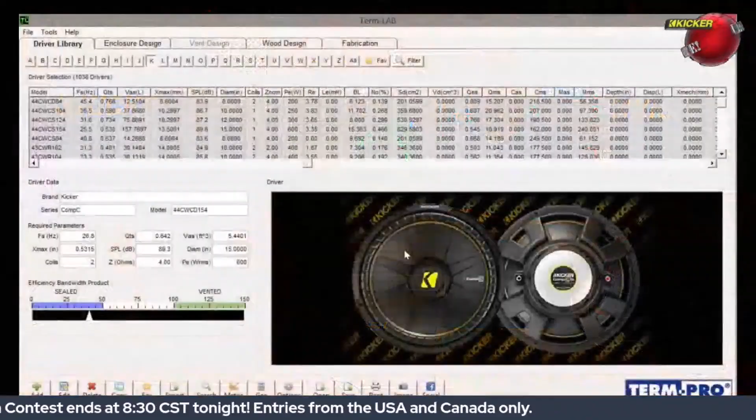Yeah. Now, I'm a customer. I have nothing in my car currently. I'm shopping. I call the number. What's going to happen in that process? I'm just trying to figure out what to buy. Yeah, well, we just ask them what they're looking for, what they expect from a subwoofer system or a full system, if that's what they're looking for. Sure. At that point we need to know the vehicle so we can figure out what speakers they need, and then amplifier, obviously wire, all the accessories they need for hooking that system up. Or components.

Let's just create something make-believe here. I'm Joe, customer. I just called up, what woofer do you want? Really, I like L7s. Okay, so let's go with an L7. So let's do an actual box design here on Term Pro so you can get an idea. And you guys do this every day on the phone for customers. Oh yeah, and we can get at least a rough idea of what we need.

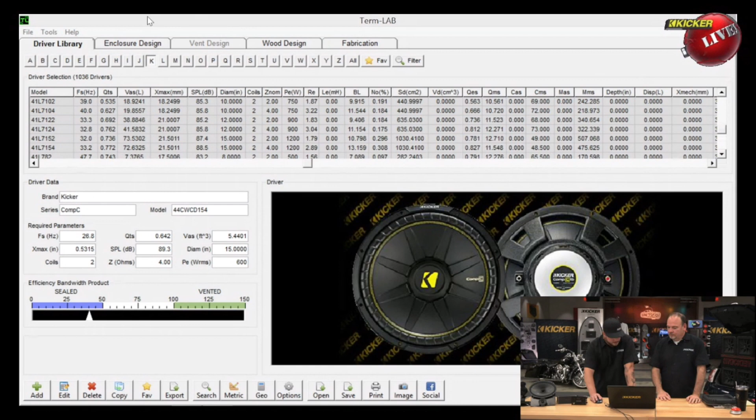Okay. It knocked out fairly quickly, and we have a lot of people that call in for SPL and want to do bandpass, or they want it for a side-by-side and they want a bandpass enclosure, because that works really well outdoors. So we'll just go ahead and do 2, and we can do just a simple 1-to-1. So 2.5. This looks pretty easy to use. Yeah, it works pretty quick, and everything's adjustable on the fly.

So after you've set your outside chamber volume, that's your sealed side in this. And then common ported chamber, so that's what you're dealing with here. And then this obviously is the response graph over here to the right-hand side. Correct, yeah. It shows our 4th order bandpass. We've got peaks on both sides. And then over here it shows our frequency response for full bandwidth.

So 36, 38? 36 is the F3 on the high pass. Yeah, up to 86, centered at 58. So 36 to 86, centered at 58. And then you can manipulate this.

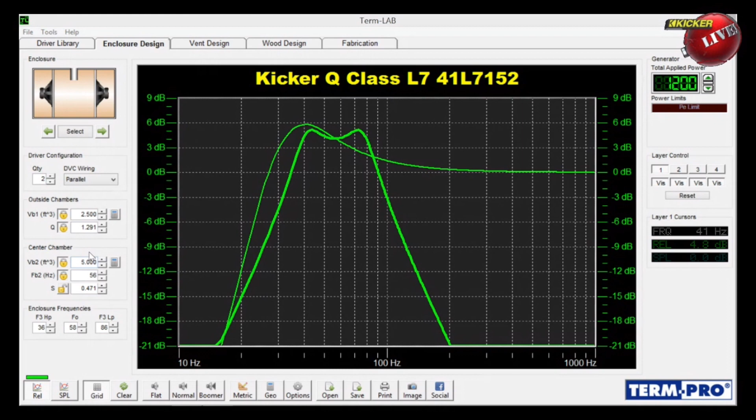So obviously with this kind of box volume, if this doesn't work for the customer at all, you could either try to make the same drivers work in that airspace, or you might end up actually saying we need to make different driver recommendations. Yeah, we can always end up going with smaller woofers. One that we see used a lot in outdoor or in just side-by-sides is our shallow woofers, so the Comp RTs and the L7Ts.

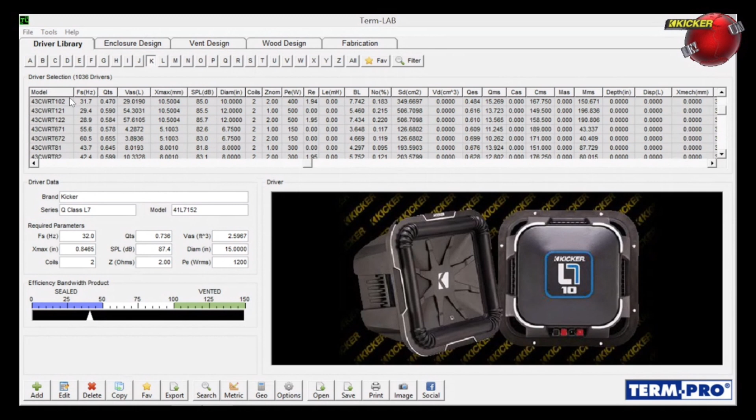Okay. And we see those used, we actually do use those a lot. So we can do a Comp RT10 or CWRT10. Do seal box. We see these used a lot in side-by-sides. Obviously, this is way more airspace than we typically see, but it still, we see our response curve, give us an idea of what area it's going to take up, and how changing box size changes tuning.

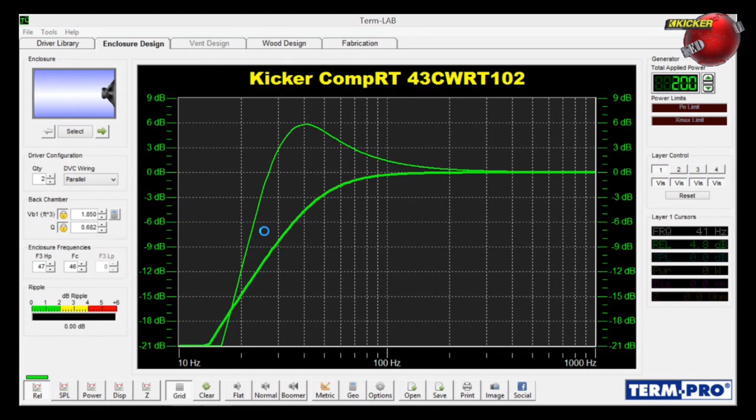And obviously, as I'm looking at here, you had the ability to go change power. So I'm assuming that's just defaulting to the RMS power rating of the woofer. Just defaults to the rated RMS of the woofer, or how much power we want to be applied. But you can always change that, and it'll typically change the response of the graph. It'll change what we see in SPL output. Gotcha. Right there. Oh, there you go. Okay. So this gives us a guess of what it's going to do as far as output goes. Gotcha. So a relative response curve and then a relative idea as far as output based on that power level.

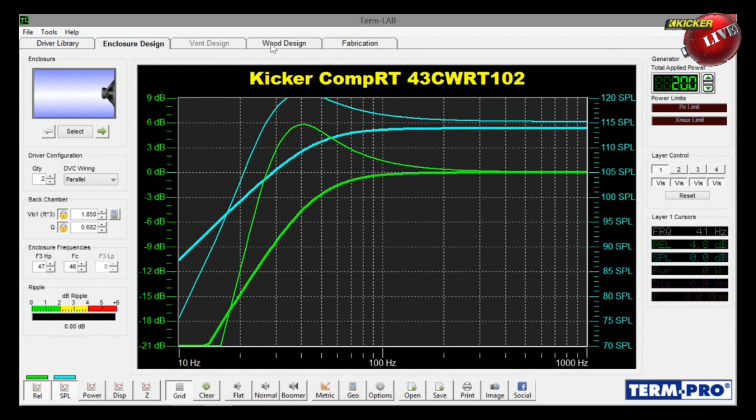Exactly. And then I saw you going over to wood design. So going over there, what does that do for us? So that'll show us an idea of what the box should look like. It doesn't give us woofer, but it gives us an idea. That's a little bit off. But it gives us an idea of how much room it's going to take up overall. So this is saying total volume is 1.9 after woofer displacement and what we set the internal airspace as.

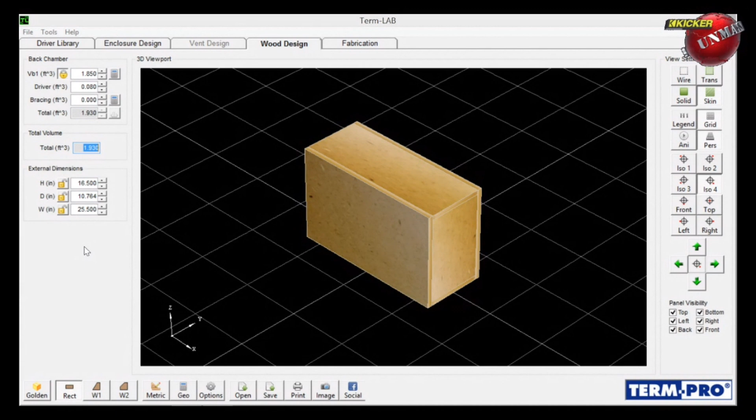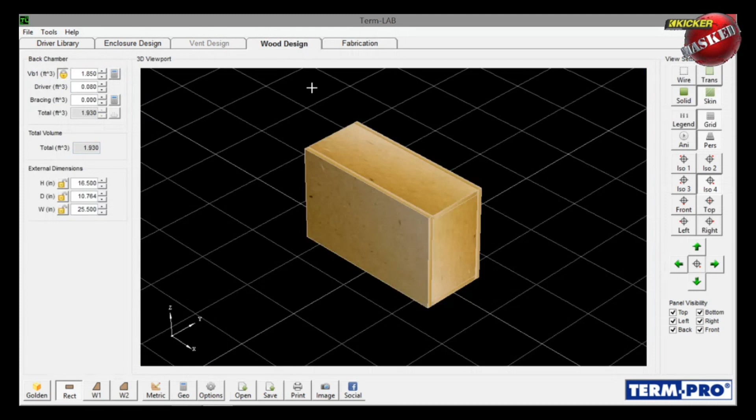So question on this, when you guys are designing this up for someone who does a call-in, do you just give them this information over the phone, or do you guys have the ability to email, fax, or anything like that with it? We can email it because it will give us a cut sheet. Typically to open a TermPro file, you have to have TermPro. So typically we can just take screenshots. And that'll give us our top and bottom panels, front and back, and our sides. And with wood design, we can take away visibility so that we can still see what the inside of the box is going to look like. That is cool.

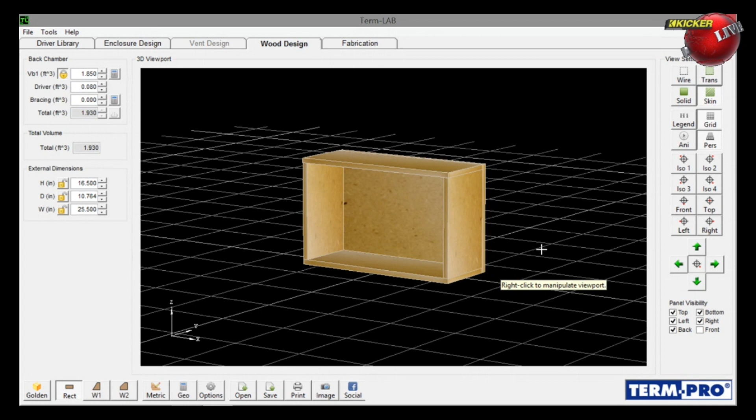So you've got the ability here, on the fly with people on the phone, to design up a box, change the volumes, play with the tuning, play with the power, and when you get something that looks realistic for their needs, you can screenshot them. And we can give them what our external dimensions need to be, and then click over to Fabrication and give them a few screenshots of what our cut sheet needs to be.

Oh, there you go. So we can change it. You can change your Y-axis plots, bar graphs. You can change your plot colors when you're looking at the response curves. Okay. But you can change the color of the wood and what material you want to use as well. So it's got a lot of preloaded dimensions there. Yeah, so 1 inch, 3/8, we can change it to plywood, and you can also change your coverings.

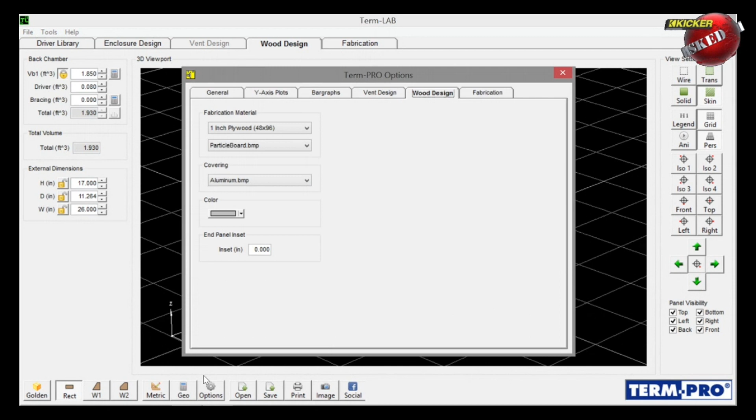Oh, this ought to be good. Particle board with aluminum. There we go. Nice. So it kind of looks like plywood, but it's got an aluminum sheen to it. Check it out. That's pretty cool.

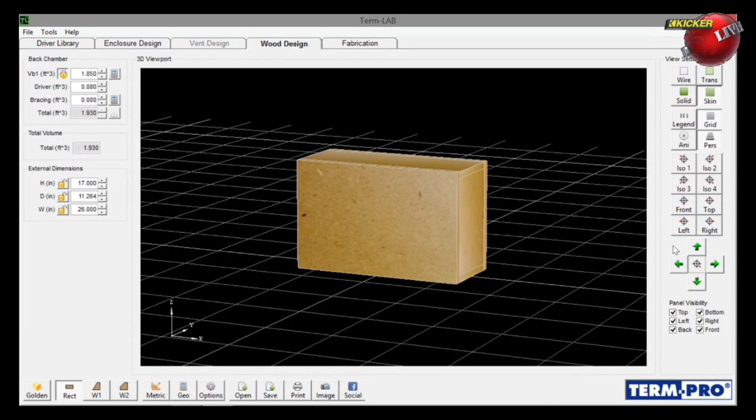So after using both programs, given the choice, you find that TermPro on a daily basis, as far as answering phone calls, dealing with people, is much quicker? Yeah, it's much easier, quicker, more user friendly. It's just quicker to use. Keep going. What I'm wondering is, and this one does give us a render, an idea of what the box should look like. Okay. Versus BassBox does not. So you do get an idea of that right there.

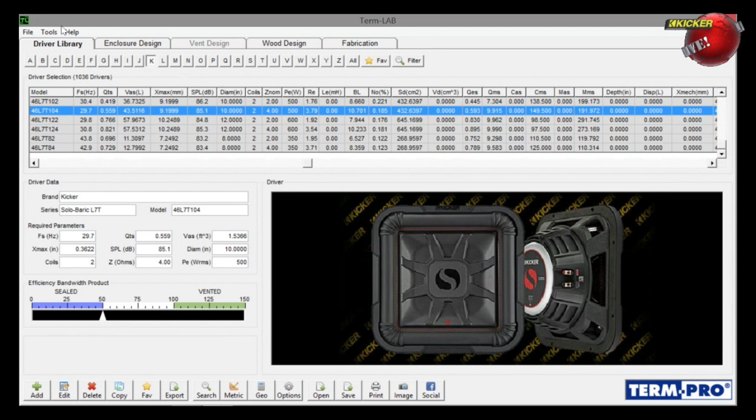Yes. So let's look at an L7 T104. Design that one up. Let's build a box for that. Ported or sealed? Just do whatever you want. I don't care, vented, sealed. It's your show, I'm just here for the ride. We'll do a single reflex band pass. Perfect. Let's do one woofer.

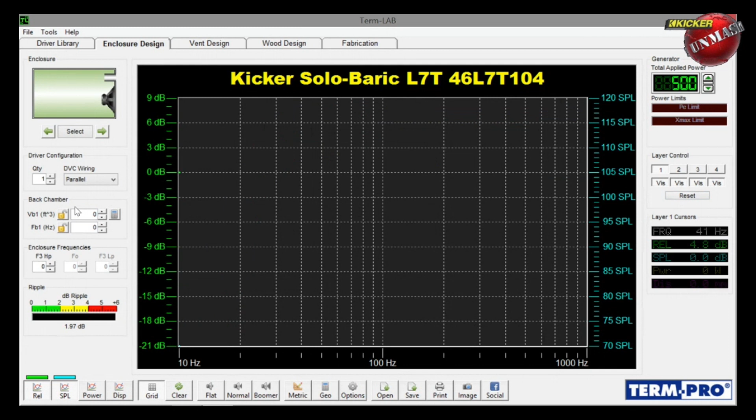So typically, even with the shallow mount subs, we usually still end up about the same size box as we would with a full-size sub, because if we try to make it smaller, we just lose so much output. Got it. But as far as ported boxes go, it'll also show us our power and woofer movement. What you're looking at here in the pink line is the excursion of the driver versus frequency. Obviously you get down to here and excursion goes way off the charts below the tuning frequency.

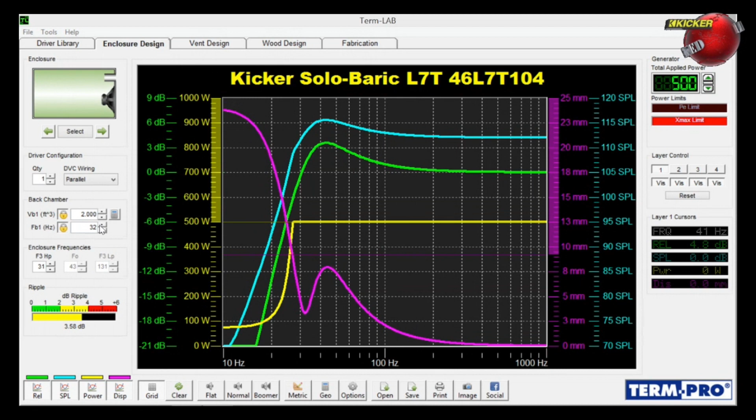Yep. And it does always want to try to tune it super low, so we can always bring that back up. And then as far as vent design, it does give you multiple options. We can do a flanged aero port, a round port, or a rectangle slot port.

Well, this is an awesome tool that we have at our disposal, and we get to use this every day to help people design whatever fits their vehicle and get their woofer to sound the best it can in their car. This is really cool. Yeah.

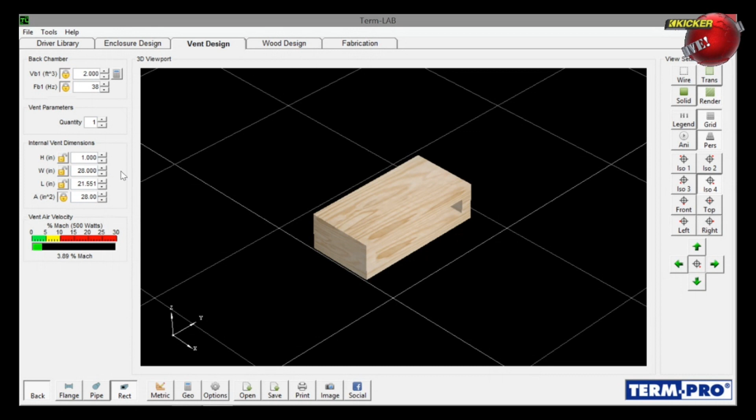And it does show us port velocity. Now, port velocity, again, I'm leading the witness. Port velocity basically is how fast the air is moving in the port back and forth. It's its speed. Is there a speed you want to avoid? Anything over 15 meters a second. If you're faster than 15 meters per second, you'll hear it. Chuffing, huffing, port noise, everyone calls it. So 15 meters per second.

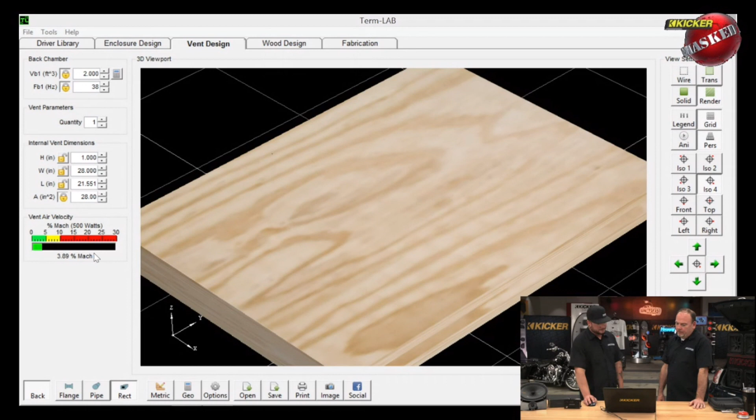And you're looking at this here, and this is the speed. This is in Mach, and I'm not sure what the exact conversion is, but I've built a couple boxes out of this program, and staying in the green is good to go. You're fine. 15 meters per second is what I've always been shown as the industry standard. Try to stay at that or less, and you won't have to worry about port noise in a box design.

Yeah, but even if we have to use small ports, like round ports, just because of how big our box is, typically an aero port's going to help resolve some of that.